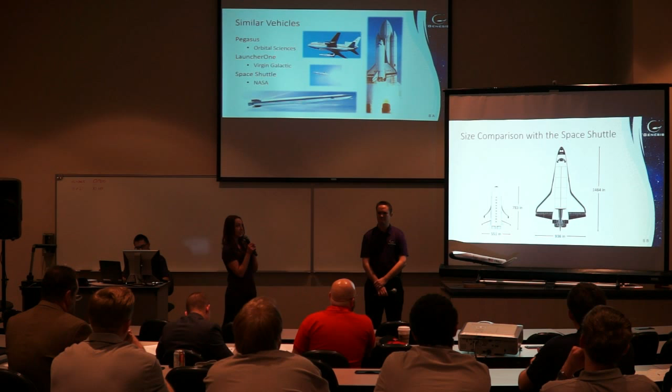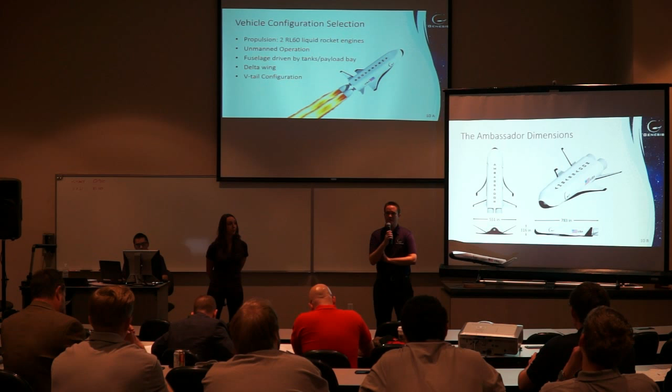And so now, these are some design configuration choices that Genesis made when first coming up with the design of our vehicle. Firstly, we're using 2 liquid rocket engines. They're Pratt & Whitney RL-60s. It was a program developed back in the early 2000s. We are going to be unmanned.

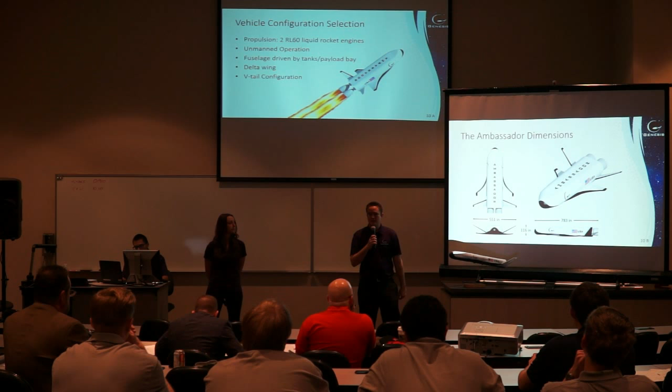We have a low and wide fuselage, giving us lifting body characteristics. And we also have a highly swept delta wing and a V-tail configuration. Now, an overall aircraft 3 view is shown here on the secondary screen with the vehicle's dimensions shown. Now I'd like to invite Wes up to talk about the layout and design of our fuselage.

Thank you very much, Brandon. So I'll be going over the layout and design of the fuselage as well as the payload bay. So our RFP designates that we have a maximum weight limit of 75,000 pounds. So we opted to go for an unmanned design. This saves us weight on systems such as life support systems and pressurized cabin for human spaceflight. Then this drove our design to just fit around the tank system that we have on the Ambassador.

As our design went on, the fuselage became a little bit bigger due to the extra structure we added on the inside to account for torsional and bending forces that we're going to see. Third of all, we have an electronics bay that will be controlling our flight systems because we are unmanned. Now this electronics bay, as you can see on the primary screen, is located around the fuselage. This will be on both sides of the fuselage. This will have systems such as flight computers, telemetry data, transceivers, and transponders.

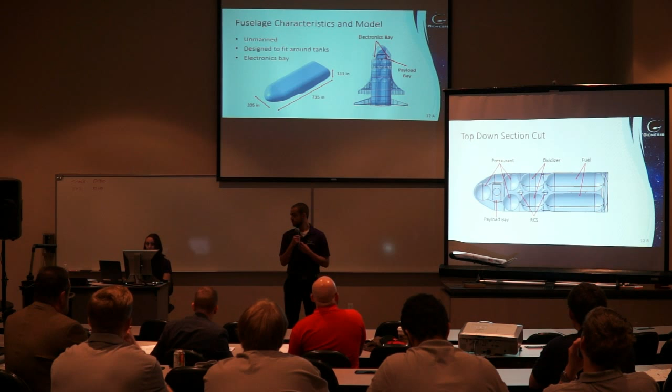This payload bay also needs to be easily accessible, so it's placed towards the top of the Ambassador spacecraft. This is for ground crews to perform maintenance on the payload bay when necessary, as well as install the payload bay easily. Our door system for this will have a two-door system on the top that will swing out when we are in orbit and ready to jettison the payload. The two doors will be electronically latched, and they will have a hinge system attached to the payload bay.

Now, the materials for the payload bay will be aluminum, which will be for the attachment and deployment system, which I'll be discussing in a second, as well as carbon fiber reinforced polymer. The box itself will be made out of the carbon fiber. So now going into the attachment deployment system. The top plate is going to be bolted to the satellites. This is similar to how the Pegasus launch system does their satellites.

This top plate will be attached to the bottom plate with a V-band clamp that has a remotely activated pyrotechnic charge that will be activated when we're ready to release the payload. In between the top and the bottom plate, there will be retention springs as well. Now, these springs are in compression when they start, and then when the V-band clamp is released, the springs will become out of compression and push the payload out of the payload bay. So, now I'd like to invite Eric Lopez up to discuss the layout and design of our wing.

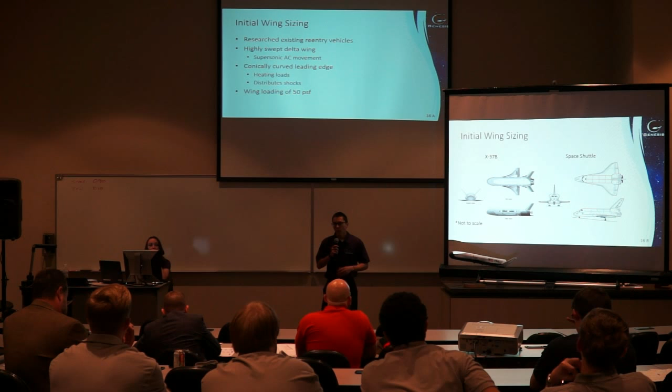Thanks again, Wes. Now on the primary screen is a list of some of the key information we chose going into the design of our wing. We had to research some pre-existing reentry vehicles, and they're shown on the secondary screen, the X-37B and the Space Shuttle. This assessment of these two vehicles led to our conclusion of having a highly swept delta wing. We also incorporated a conic leading edge. This is to help distribute the heating upon reentry. We also went with about a 50 PSF wing loading. This is lower than our initial 60 PSF estimates we came up with.

This is due to the fact of reentry vehicles. They tend to have a lower wing loading. This helps distribute the heat more upon reentry as well.

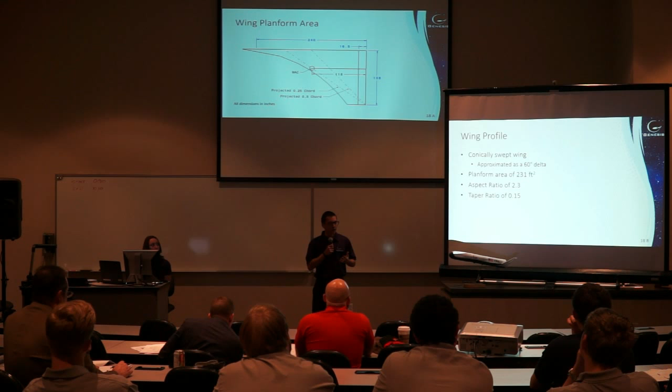On the primary screen is a planform area of our wing. It comes out to an area of about 230 feet squared. It has an aileron that expands the full length of our wing. As you can see, in order to analyze the wing, we had to break it down into a 60-degree delta wing with an aspect ratio of 2.3 and a taper ratio of about 0.15.

On the primary screen is a lift curve slope for our wing. This is created by turning the 0010 and the 0016 NACA data into the lift curve slope you see in yellow triangles. On the secondary screen, to further analyze, we did a lift curve slope at Machs 1, 2, and 3. To note, as the Mach number increases, the CL alpha and the CL max both decrease.

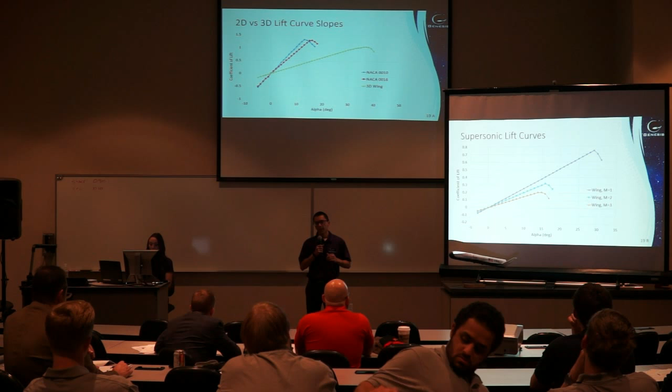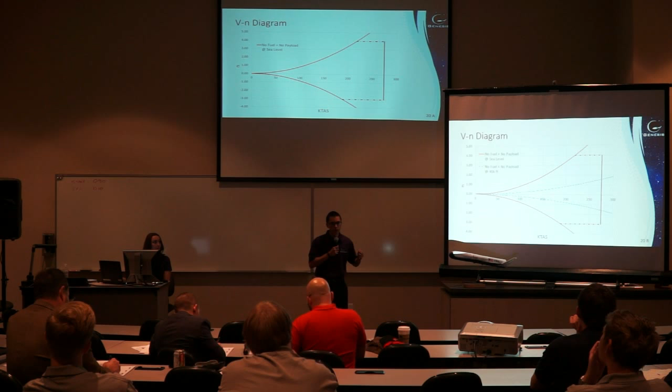On the secondary screen, note the stall lines for our vehicle at 40,000 feet. For various other phases of flight, our Q limit is theoretically up to around Mach 20, so it's not shown in this graph. But analysis has shown at 40,000 feet, our forward velocity is estimated to be around 250 knots. So this graph shows that around 40,000 feet, we may be able to gain some sort of lifting characteristics of our wing. And now I'd like to invite Chris up here to talk about the empennage and stability control.

Thank you, Eric. So as you can see on the primary screen, these are 4 of the designs we considered for the empennage. The 2 primary ones I want to focus on are the vertical tail and the V-tail. We initially decided we were going to go with the vertical tail configuration. However, after estimating the effects of the fuselage and the stability of the aircraft, we decided to go with a V-tail to increase the longitudinal stability.

On the secondary screen, you can see a size comparison of the Ambassador with the X-37B, along with some dimensions of some parameters of the V-tail. The V-tail features a NACA 0012 profile and also is an all-moving control surface. In addition, some advantages are that the V-tail removes some of the downwash effects of the wing and also removes the tails from the fuselage blanketing effects.

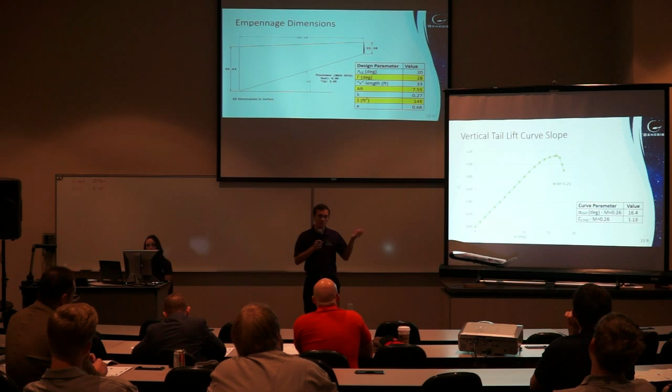On the primary screen now you can see a dimension drawing of one of the V-tail sections. Some important parameters of note are the dihedral angle of 28 degrees, the aspect ratio of 7.55, and the planform area of 145 square feet. On the secondary screen here you can see a CL alpha plot of the V-tail section, and as you can see the CL max is about 1.13 and the stall angle of attack is about 16.5 degrees.

So here on this primary screen you can see a longitudinal X plot marking the stability of the Ambassador. In our most critical condition we have a static margin of 1.4%. This is relatively low, and to compensate for this we've added a flight control system to allow better control of the sensitive static margin. On the secondary screen you can see the directional stability of the Ambassador.

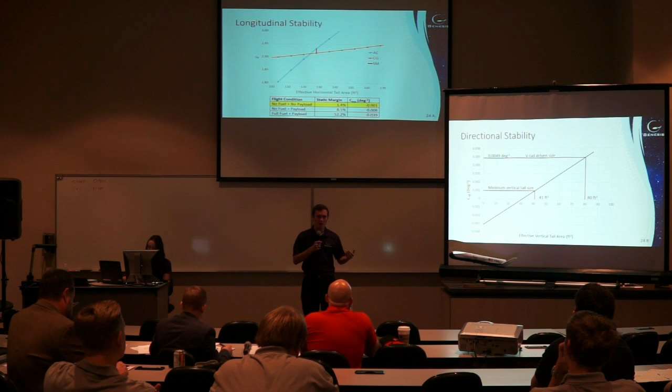Because the longitudinal stability drove the size of the horizontal aspect of the V-tail, this also affected the effective vertical tail area. According to Roskam, a CN beta value of 0.001 is sufficient to maintain static stability of an aircraft. This would have produced an effective vertical tail area of 41 feet squared. However, because of the driving constraint of the longitudinal stability, this increased the V-tail's effective vertical tail area to 80 square feet, giving a CN beta value of approximately 0.0049.

Now I'd like to welcome Neil Noonan up here to talk about the propulsion system and reaction control system. Thank you, Chris. I'll be talking about the propulsion system, and this includes our engine selection, our tank design and layout, as well as our reaction control system.

So in selecting an engine, on the primary screen you can see some of the parameters we looked at. First we needed a high ISP, or specific impulse. This is efficiency of the engine, or it can be thought of as like miles per gallon. A high specific impulse allows us to have a lower amount of propellant mass, and more of our overall vehicle mass can be structural.

We also needed high thrust from these engines. When we are dropped, we want a thrust to weight ratio greater than 1. Then we also need a low mass for these engines, so that the mass of the engines doesn't cut into our structural mass too much. We also wanted a high engine lifetime because we are reusable. We do not want to have to replace these engines every single time we fly.

On the secondary screen, you can see some of the engines we looked at. We looked at almost every existing engine and evaluated them with the parameters I just described. We first originally chose the RL-10. This was designed in 1950 with some small subsequent upgrades since then. We determined that to get a thrust to weight ratio greater than 1, we need 4 of these engines, which provides more points of failure for our design. It also has a lower ISP, so we needed to find a more efficient engine that produced more thrust.

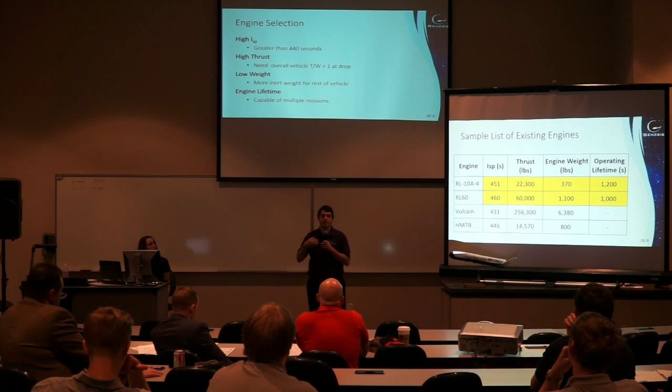For the RL-60, the lower part of the nozzle has a different cooling method than the main part of the engine. It's radiatively cooled, and we have to replace it every 4 launches. The main part of the engine is regeneratively cooled, and we can replace it every 16 launches.

Now I'll talk about our tank design. For our propellants, we need to store liquid hydrogen and liquid oxygen. That's what the RL-60 runs off of. We know that spheres are more structurally efficient, but to get a better aspect ratio for the overall vehicle, we decided to go with cylindrical tanks with spherical ends. We also decided to make these tanks out of carbon fiber only. This is a technology that is being developed by companies in the market.

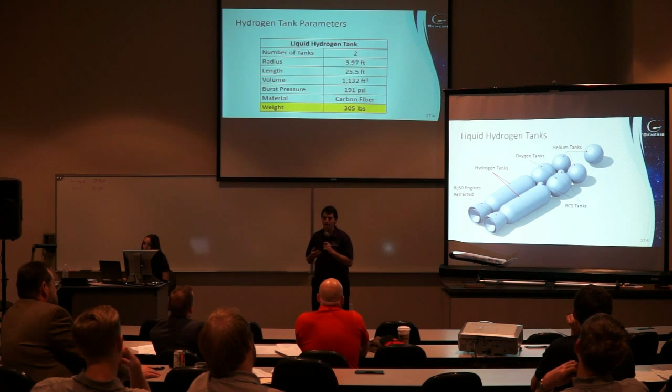On the primary screen, you can see some of the dimensions for our hydrogen tanks, and on the secondary screen, you can see their location in the vehicle. Now I'm also going to talk about the oxygen tanks. They have the same designs, cylinders with spherical ends. On the primary screen, you can see their dimensions, and on the secondary screen, you can see their location.

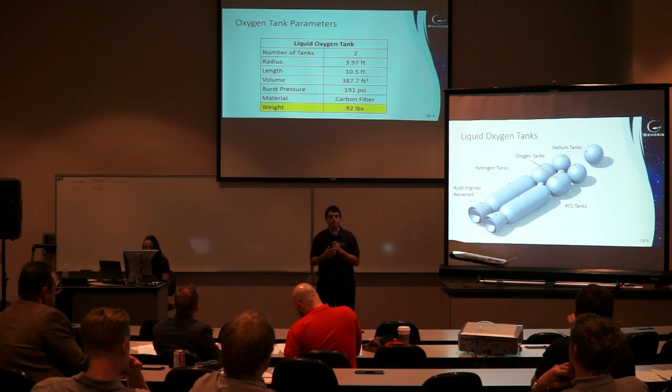When the vehicle is being launched, we need a pressure gas to backfill those tanks and make sure they remain structural. For this, we used helium, which is an inert gas. You can see on the primary screen our helium tank dimensions. We decided to make them spherical tanks to make them more structurally efficient and lower the mass, because these pressure tanks are at a much higher pressure than the propellant tanks.

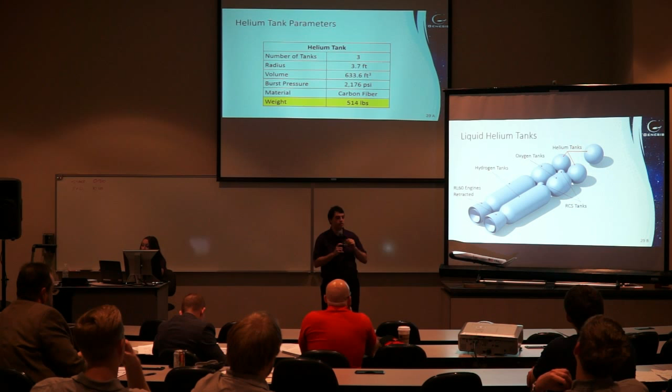We also decided to split them into 3 separate spheres. This allowed us to push the 3rd sphere out, as can be seen on the secondary screen, to provide room for the payload bay and electronics bay.

Now I'm going to talk about the reaction control system. When we're in space, there's no air to move over our control surfaces, so we need to have a way of controlling the attitude or orientation of our vehicle. For this, we decided to use cold gas thrusters. You can think of these as scuba tanks with nozzles on the end.

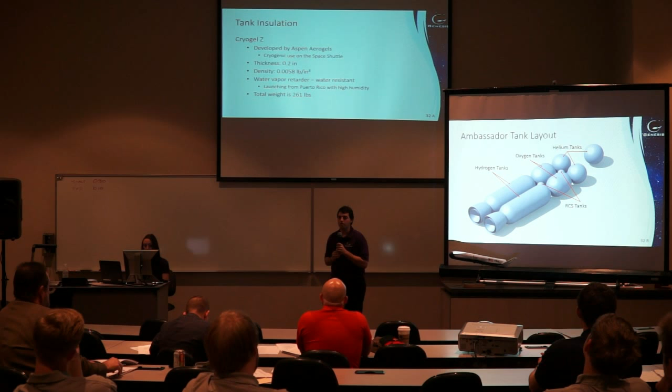Now I'm going to talk about the tank insulation. The fuels we're using, liquid oxygen and liquid hydrogen, are cryogenic. It means they're stored liquid at very cold temperatures. We need to make sure that our fuel doesn't boil off as it heats up and is transported on the PT-1. So we are using Cryogel Z to insulate the tanks and make sure they remain at the temperature necessary. Now I'd like to invite Michael up to talk about weight and balance analysis.

Thank you, Neil. So some of the overall mission weight estimates are shown on the primary screen. The takeoff gross weight is just under the RFP requirement of 75,000 pounds. Most of this weight is accounted for by fuel. The landing weight of the vehicle is just under 11,500 pounds. On the secondary screen, you'll see some estimates for the fixed equipment weight of the Ambassador that includes things like our flight computers and our actuators.

The methodology for determining the weight and balance of the Ambassador was to take the weight estimates for each system and moment arms generated from the CATIA model and sum those together to find the total center of gravity for the vehicle. This was done for 3 flight conditions, which are shown up on the primary screen. On the secondary screen, you'll see the weight and balance station diagram for the Ambassador.

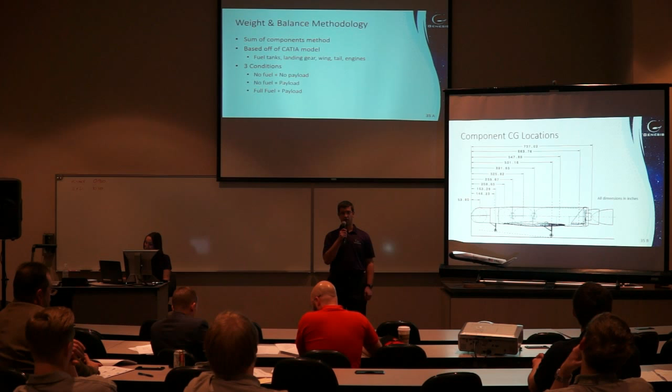Now on the primary screen, we have the percentage weight breakdown for the empty or landing configuration. These weights are much more reasonable for an aircraft, with the highest percentage being the structure at just over 26% of the weight. This is followed closely by the fuel tanks and by the engines. On the secondary screen, again, we have a more detailed breakdown of the weight, including the CG locations in this condition.

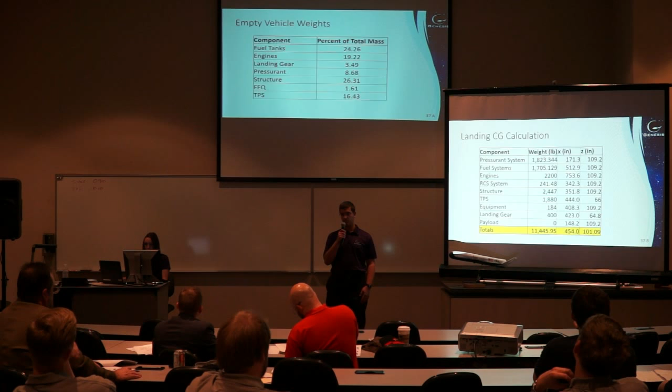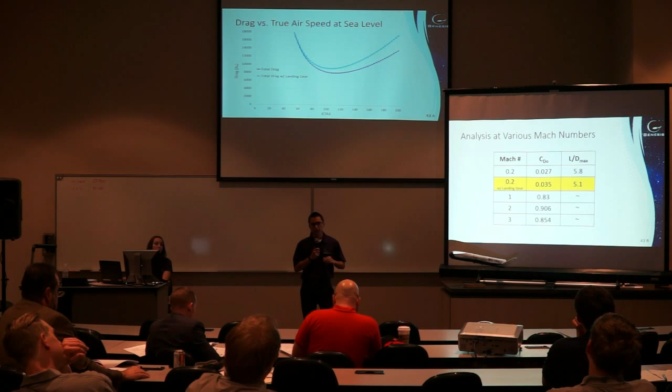On the secondary screen is a table of some of the key information pulled from the drag polar. Once again, the most critical case is about Mach 0.2 with the landing gear deployed. This gave us a CD0 of about 0.035 and an L/D of about 5.1. This is very comparable to other lifting bodies as well as the shuttle, which had an L/D of about 4. And now I'd like to invite Chris up to talk about the structure and the landing gear.

My bad, Nick. Thank you, Eric.

In design of the landing gear, we chose to emulate systems on similar aircraft, specifically that of the space shuttle. There were 3 constraining factors put upon us by the RFP and ourselves in the design process. The first of which was weight. We're limited to a 400-pound weight budget for the entire system. Number 2 was system reliability, and 3 was size, as the retractable gear needs to fit inside the vehicle.

Additionally, we chose to go with more exotic materials than the typical steel that's used for landing gear systems. To replace most of the steel, we will be using aluminum. However, the drag brace itself will be carbon fiber epoxy, as well as magnesium wheels.

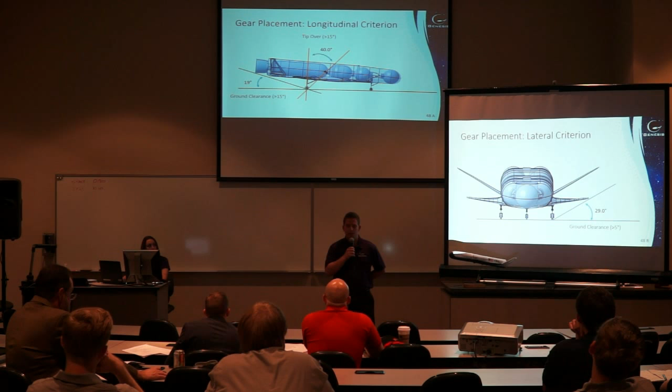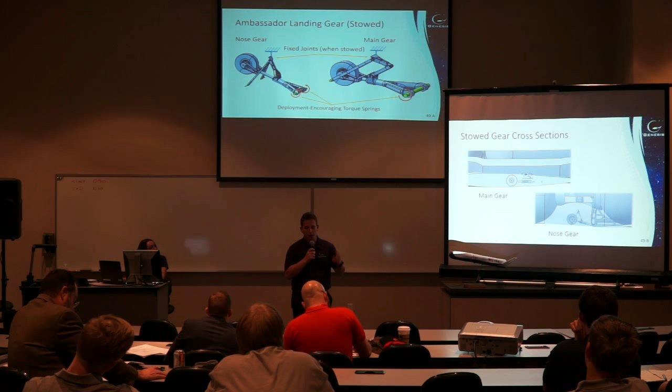Furthermore, the gear is forward deploying, enabling the airstream to assist in this deployment. And last but not least, there is a mechanical locking mechanism to ensure that once the gear is at its fully deployed state, it does not retract any amount. The secondary slide, you can see the cross-section views of the gear within the nose section and the wing root.

On the primary slide, you can see our internal structure. Our internal structure is broken down into 5 main components, first of which is the keel beam. This connects the V-tail and the wing internal structures. We also included tank braces, as you can see in purple. Those tank braces are woven into the tanks and provide structural support between the tanks.

In combination with the keel beam, the tanks actually provide a reasonable amount of structural support for the vehicle, as they are ideal or nearly ideal pressure vessels, and in any tank at any given time, the internal pressure does not drop below 6 atmospheres and can range up to 14 atmospheres. These tanks do provide structural support.

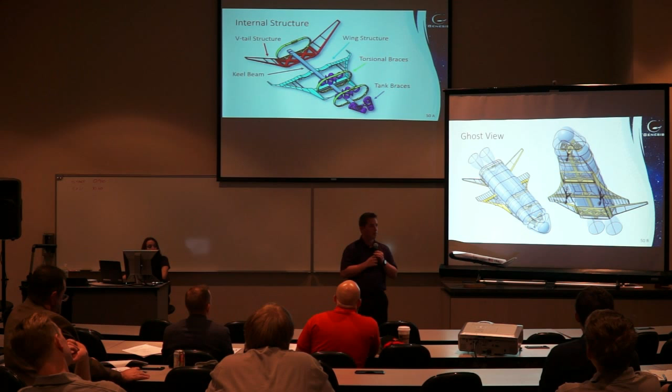Additionally, the torsional braces, seen in green, provide the skin size and shape integrity, as well as provide hard points for the PT1 to attach to. On the secondary slide, you can see our ghost view of the vehicle with internal structure highlighted in yellow.

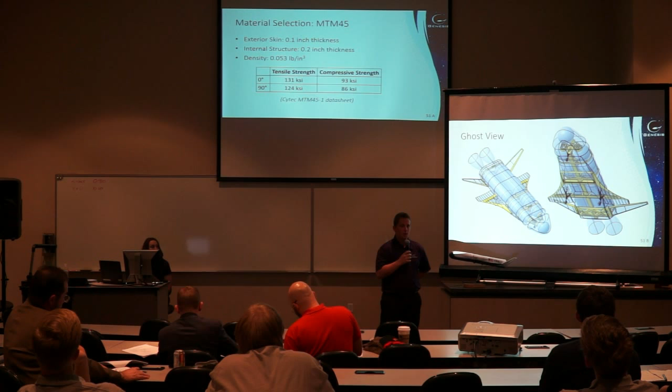The primary slide details our material selection. We decided to go with MTM45 carbon fiber as provided by Cytec. This carbon fiber will be applied for the internal structure in its entirety, as well as the skin of the vehicle. Now, this decision was mostly driven by the fact that we need to be a light vehicle and therefore need an aggressively light internal structure. So the carbon fiber of choice provides a competitively low density while maintaining a significantly high structural capability.

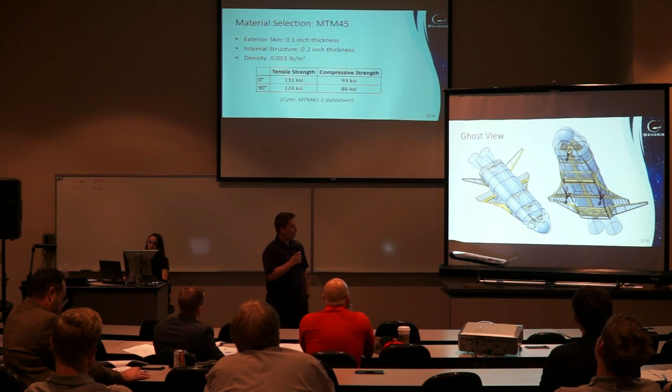Now I'd like to invite Morgan to come talk with you about thermal protection and trajectory analysis.

Thank you, Nick. So in order to determine our thermal protection system, we need to determine the re-entry temperatures that the Ambassador would see. Because we don't have any tools to actually get the actual re-entry temperatures of the Ambassador, we had to look at similar spacecraft that have re-entered the Earth's atmosphere, the X-37B and the Space Shuttle. However, since the X-37B is a classified project, all of the data is proprietary. So all of our re-entry temperatures are based on the Space Shuttle, which actually provides a more conservative estimate since it's larger than the Ambassador.

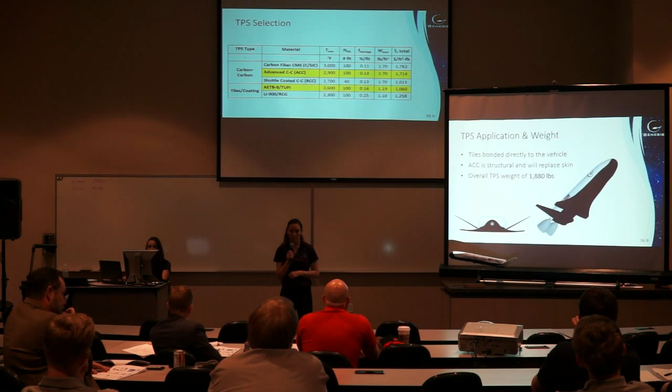We also had to look at our orbital trajectory, which is the path the ambassador will follow throughout its mission. This was needed in order to determine our achievable altitude. We used MATLAB to create an optimization program to optimize our orbital trajectory. This took into account our gravity, mass, drag, and thrust. Thrust is what we're trying to optimize.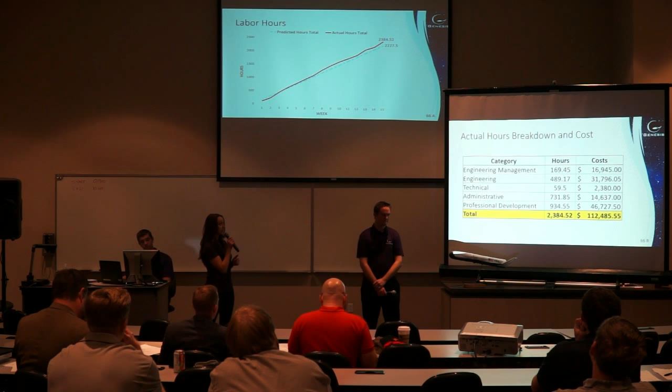On the primary screen, you can see some labor hour breakdowns. Now this is just for the Genesis team. The dotted line in blue depicts the predicted hours that we would spend working on this project throughout the semester. Now this was estimated by assuming all the students would spend 2 hours outside of class for every hour in class. The red solid line depicts the actual hours we have worked on this project, and we are slightly over. On the secondary screen, you can see the breakdown of 5 different categories we decided to split the hours of our time for this project. You can also see an overview of the cost and hours.

And now just to give you guys some conclusions to wrap everything up here. One conclusion that Genesis drew is that we have an aerodynamically sound vehicle. All of our analysis showed that we would be able to be stable in all of the phases we expect to be flying in with the addition of a flight control computer. And then we verified this with our flight test model as well.

Some other conclusions we drew was that we have an aggressively light structure, which means it would be difficult to manufacture a real-life version of this vehicle. And we also have a low orbital altitude, meaning that any of our small satellite payloads wishing to go to a higher orbit would need an additional propulsion system added to it. Both of these affect the marketability and practicality of our vehicle, and they're both caused by our propulsion system not being as efficient as we would like it to be.

So in order to remedy this, Genesis would recommend designing a more efficient propulsion system were this to be built in the future. A more efficient propulsion system would lend more weight to be used as structure and could also carry us to a higher orbital altitude, eliminating the need for that satellite payload to have its own extra booster attached to it, thus increasing our marketability and our practicality.

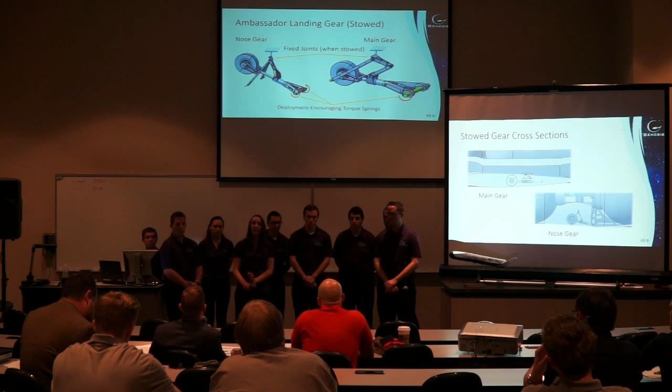Again, good job. It was a good presentation. Are you guys going to have any cameras on the vehicle to make sure that you're off the PT-1 or to watch the deployment of your payload? We will have a camera. That's actually how we're going to fly the vehicle, because it's going to be kind of like a remote control. Somebody on the ground will be flying the vehicle, so we will have cameras installed in order to control it and make sure everything's going properly.

Okay, so there's no autonomy for any of the flight? It will have to be autonomous for most of its flight, especially during re-entry. There's a blackout that will occur during re-entry. Ionized gas around it will prevent any signal getting to or from the vehicle. Any pilot link would mostly be on approach to the runway. Now, it's likely we could have it autonomous the entire duration of the flight. However, we would have that pilot data link for landing as a backup.

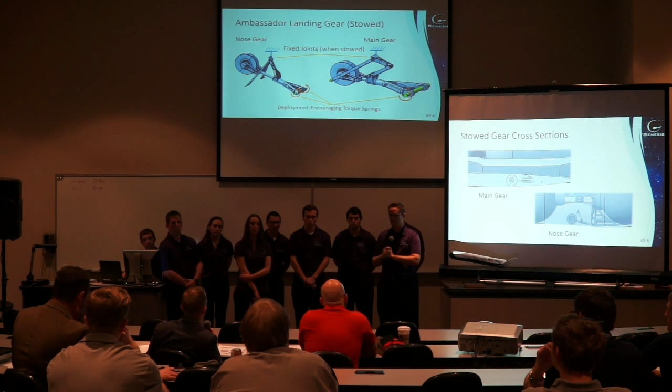And just to clarify for me, was the release attitude from the PT-1 level flight or nose high or anything? It was assumed to be level flight. Okay. Slide 31, Bravo. Kind of similar. At first I didn't know what I was looking at here. It took me a second. So I believe that's the nose of the aircraft.

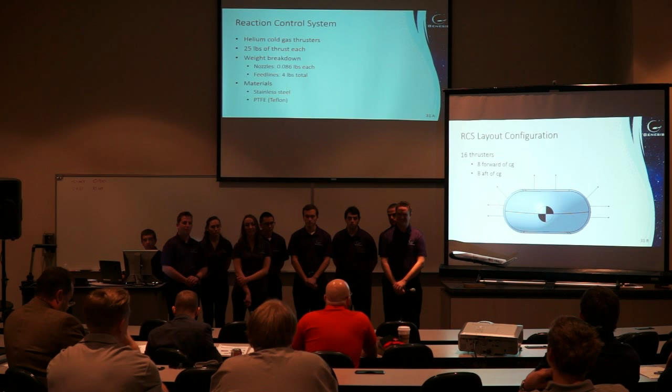Okay. And 38 Alpha. So for me, it's nice to have this graph, but I don't really know what's going on with the vehicle. So I think it would be good to have a side view of the vehicle and show how the CG changes in relation to the vehicle, because even though it's in front of the aerodynamic center. Yes, that's correct. Yeah, it's hard to see that, because I don't know if the nose is 0 or... Yeah, the nose is defined as the 0 position, and typically the textbooks we have don't show a side view of the aircraft with it, but that's a really good suggestion that would help make things easier to see on this. Just to show the difference. Yeah.

And then 46 Alpha. The use of non-traditional gear materials. I know you guys couldn't really do a cost analysis, and it was just kind of an assumption of 1.5 times the cost of the other craft. But would use of non-traditional gear materials, do you think that would drive up the cost more? Absolutely. It would probably be a very expensive landing gear setup to get it as light as it needs to, which plays into our difficulty to manufacture such a light vehicle. That's where more efficient engines would give us more weight to get the cost down even more. 50 Bravo.

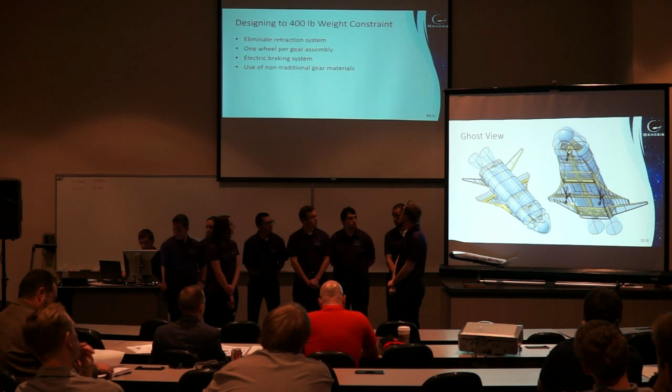I guess off the top, I don't know. So with the skin and the structure, did you guys consider, like, stringers going along the sides or the top? I don't even know if that's the right terminology, stringers, to be honest. Yeah, so we'll go ahead and hand this over to our main structural team member here. This is Nick.

Good question. Because we do not have the tools to analyze such a geometrically complicated structure that is carbon fiber, we decided, instead of modeling as many stringers as you might typically see, to go with more solid bodies, like in the torsional braces, a lot thicker than they would need to be, so that mass would be distributed among stringers. However, as opposed to an aluminum body aircraft, there's much less flex in the skin with the carbon fiber, so you would need less stiffeners. So that was our thinking along those lines.

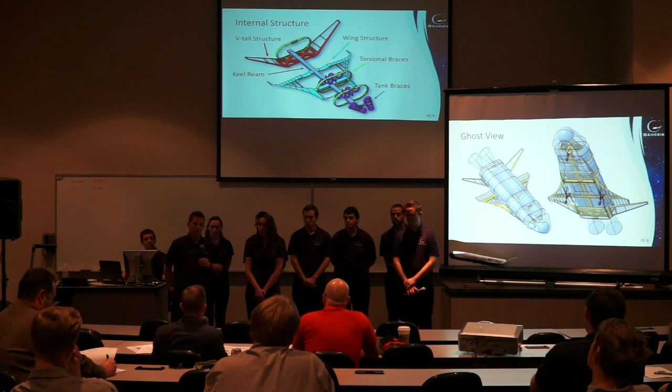Okay, thanks. And then 63 Alpha Bravo. Just wanted to comment. Good job. I think it was ambitious to do the flight test. It kind of gives me warm fuzzies about your design. I'm sure it gave you some too. But I think that was a good addition to your research, and just kind of proving to yourselves, or at least questioning, hey, does this really work?

Going forward, referring to the last slide I talked about, I think it would be good to see an ANSYS model of the structures, and perhaps, it might be hard to do with skin too, but just because it's so unique, just to see how it interacts. I don't know how you would do it, but it's not my problem. So, that's all I have. Thanks. Thank you very much. Thank you.

This one has no comments. Most of what I want to say is comments for the next time you do this. On slide 6B, you want to talk about that allowable risk to the public and what that number means. Same comment to the other group. Anytime you got big groups of tables of numbers, and you got a lot of them, those need to be converted to some sort of picture. These things can be pie charts, they can be annotations on a picture of your airplane. Do something to make it not a table.

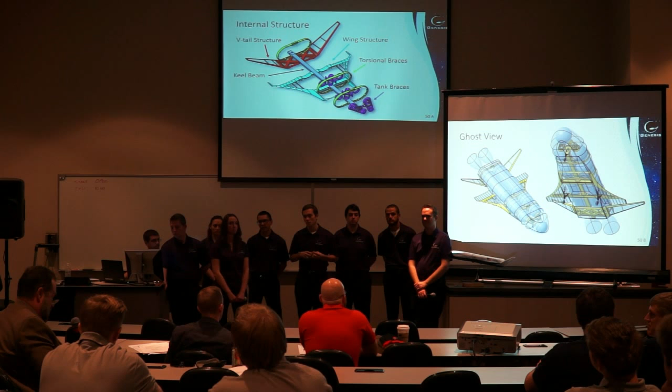But when you get ready to do your wind tunnel model, I want to point out some things that are going to be real key. The radius of curvature around the edge of that body is going to be important. The shape of that nose is going to be important. I don't know how many parameters you're going to be able to look at, but you're certainly going to want to put that body flap in there and check your pitch control. You're certainly going to want to check your lateral directional stability. Like he said, this type of body is notorious for having absolutely lousy roll-off.

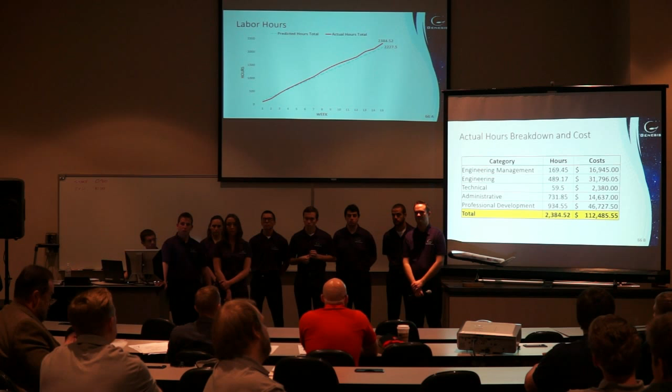If you're going to show me hours and cost, you need to show me rates. Other than that, anybody else have questions? We probably have time for one. I got 2 really quick questions. Was there a specific place you guys were going to land after re-entry? Yes, so we're actually launching and landing at Puerto Rico, and the reason for that is it's the closest U.S. territory to the equator. So that will help minimize our delta V, or change in velocity, to get to orbit.

And I don't recall seeing a cost comparison, and it would be tough to get this thing to go through to the next phase if they don't know if it's cheaper or more expensive. That was in the very beginning of the presentation. Right after going over the similar vehicles for the design, we had the weight and cost comparison there. Thank you. The only other thing I can think of is if you're gonna do an 8-hour turnaround, you have to have 2 pits. Thank you very much. I thought that was great.